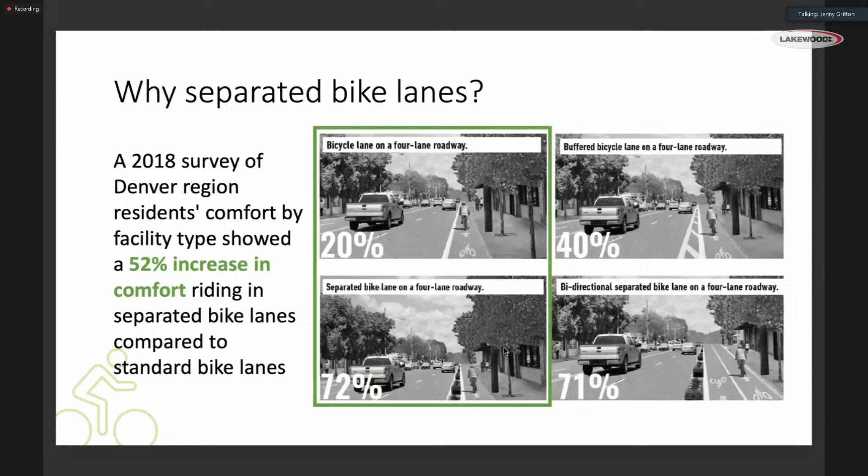This presentation is going to cover the next year of separated bike lanes in general, but there's a lot of focus on Garrison. That's the separated bike lane we most recently restriped during the annual overlay last July, and it's also a bike lane with a specific configuration I'll get into in a couple slides. I wanted to give a little special attention to Garrison - so why are we focusing on Garrison? Why is it the first separated bike lane we're planning on installing on Garrison Street?

A big part of that is because it's the only comfortable crossing of the 6th Avenue Freeway, which is the biggest barrier to bicycling in the city of Lakewood. Garrison is one of the safest places to get past that, so that's the primary reason we're focusing on Garrison.

It has a lot of connectivity between important destinations, parks, commercial districts, schools, down to the Bear Creek Greenbelt. It's also a Jefferson County regional bike route. There's a Central Bikeway that cuts all the way through several municipalities, and this is our segment of it, Garrison Street down to Estes.

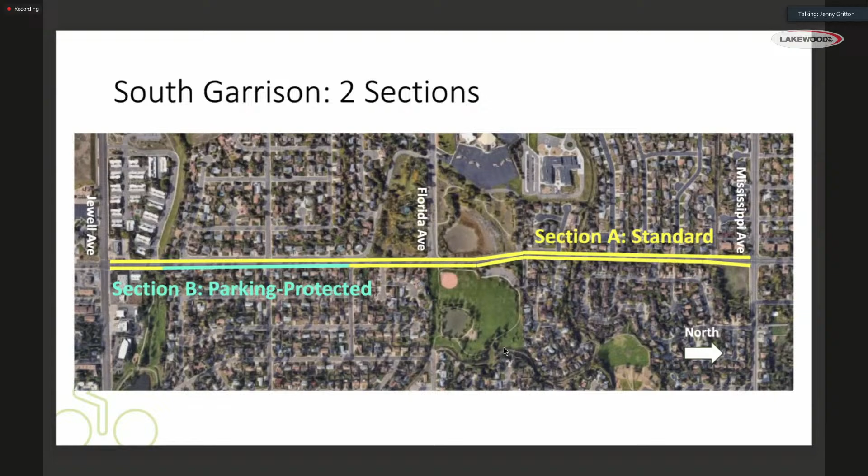Section B, highlighted here in teal, is what we're calling our parking protected segment, or parking protected bike lane. That's a bit more of a complex design that allows the existence of on-street parking and a separated bike lane by switching the configuration, which I'll get into in a couple slides. It's a little more complex and there are some more complicated trade-offs, but it was really the best option as we saw fit to go through with this segment, assuming we're able to complete separated bike lanes for the entire mile-long corridor, which was our goal.

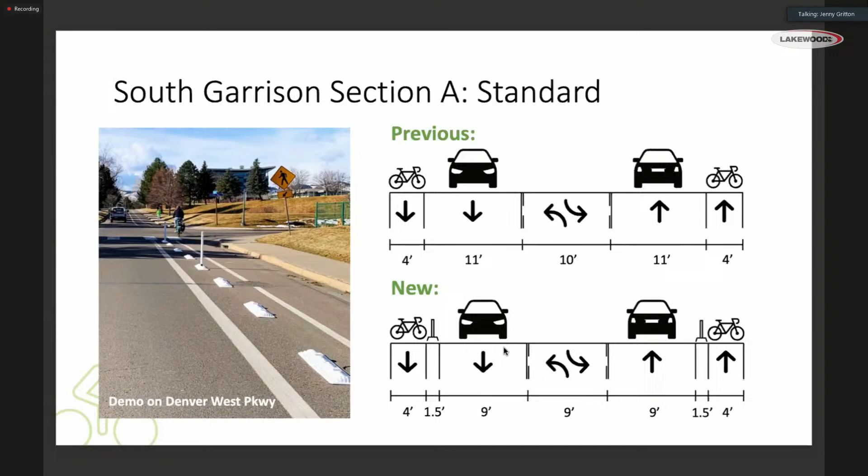That's a nice bike lane, we love to see that. But as the road existed before, we had bike lanes on either side, then a travel lane, but then we had that parking lane on the side directly adjacent to the curb. That's the condition that existed before, and that's the condition that exists on many roads throughout Lakewood. It's not an uncommon thing.

We also borrowed a few feet from the travel lanes like we did before so we could create that buffer space. But the main difference in this configuration is that the parking lane is no longer adjacent to the curb—the bike lane is adjacent to the curb. There is a separation, and then the parking lane is directly adjacent to the travel lane.

Now, the reason we did it this way—there are several reasons—but a primary reason is so that the parked cars themselves can serve as that vertical separation between the moving traffic and the bicyclists. The more the cycling traffic is separated from motor vehicle traffic, the higher the comfort of that bikeway, so that if a car were to veer off the road, they're not going to be hitting a bicyclist—they might be hitting a parked car instead. That is the vertical separation, and that's a downside of this design, but it would be protecting that cyclist from being involved in that collision.

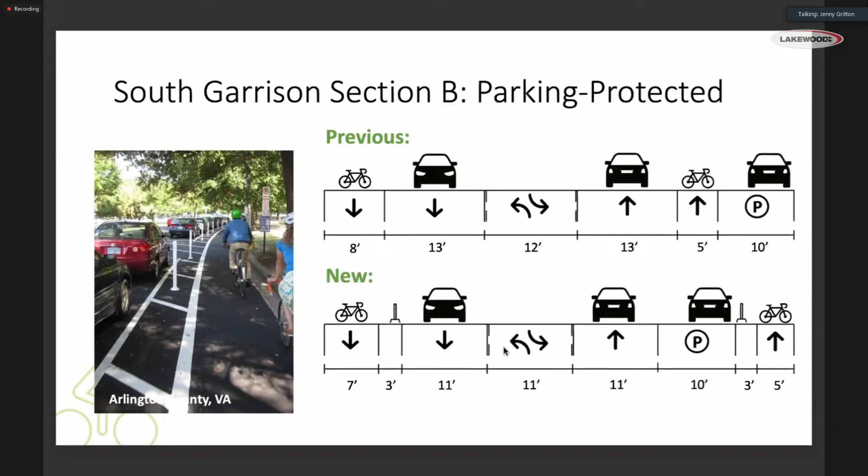Going a little deeper into the parking protected section, since it's the most complicated, it's getting extra attention. This is the only section with no vertical separation installed yet, so it's technically a new configuration right now. We've already received feedback about it, both positive and negative, and it's been a really good learning experience for if we ever install another parking protected bike lane.

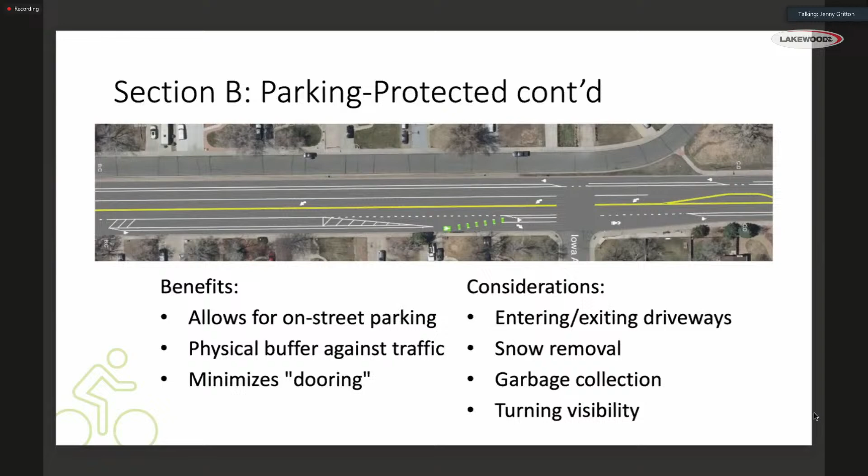We are still responding to feedback as we go, especially since the bike lane is technically not finished yet. Once the vertical separators are installed, I'm sure you'll hear more feedback that maybe we didn't think of before, and we'll have more chances to play with some solutions. But this is where we stand now with the complications that have arisen with that parking protected segment, just between Jewell and Iowa Avenue on South Garrison on that east side.

So moving forward, that was a lot, deep in the weeds there. South Garrison, our very favorite, is anticipated for completion in early 2024. Ideally, following this presentation and the final designs we're working on right now, we'll get that installed, with vertical separators going in in time for the summer riding season, which I expect will bring another wave of feedback from bicyclists able to use the facility. So that's hopefully coming in the first half of this year, which is very, very exciting.

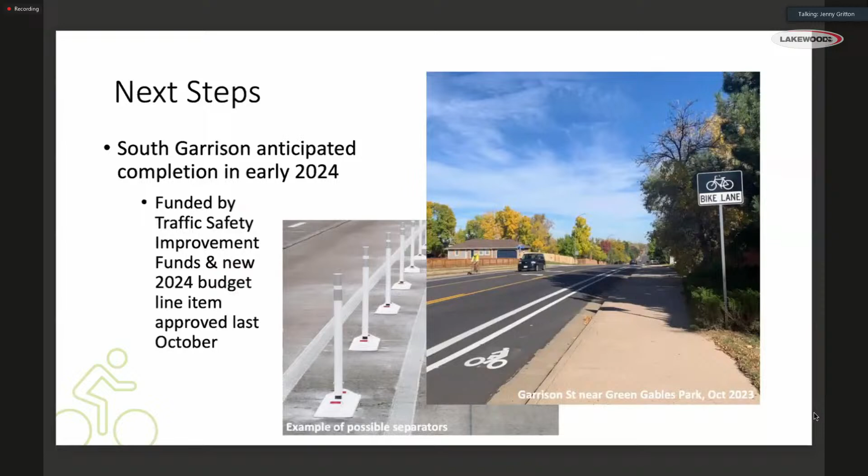We're fortunate enough to already have that funded by traffic safety improvement funds, which is partly what we've used for the initial striping, as well as a 2024 annual budget line item that was approved last October for this separated bike lane project. That was approved not only for South Garrison, but also for 2 other segments.

The 2 other roads we're looking at for 2024 that are already funded in that budget line item are a small segment of Harlan Street over on the east side, partly in Ward 1, partly in Ward 2, primarily because of concerns with cars parking in the bike lane. We've had complaints for years and years. We haven't found a good solution to get these people to stop parking in the bike lane, which is obviously a huge safety hazard. So adding those vertical separators will physically block anyone from being able to park in that bike lane, and it becomes a safety improvement for the road overall.

We're also looking to install a separated bike lane on Denver West Parkway up there in that northwest corner in Ward 1. I apologize, I said that Harlan Street was between Ward 1 and 2. I meant 2 and 3.

Long night. But Denver West Parkway up there in the northwest corner is another existing buffered bike lane that was installed probably 7 or 8 years ago, and is very highly used. It's an important connection between Lakewood and Golden, and a surprisingly high volume of bicyclists are riding on Denver West Parkway. We're looking at it as pretty low hanging fruit in terms of a first round of separated bike lanes, because it's a very wide buffer. It's a very simple street. You don't have on-street parking complications. You don't have a bunch of residential driveway complications like we see on South Garrison.

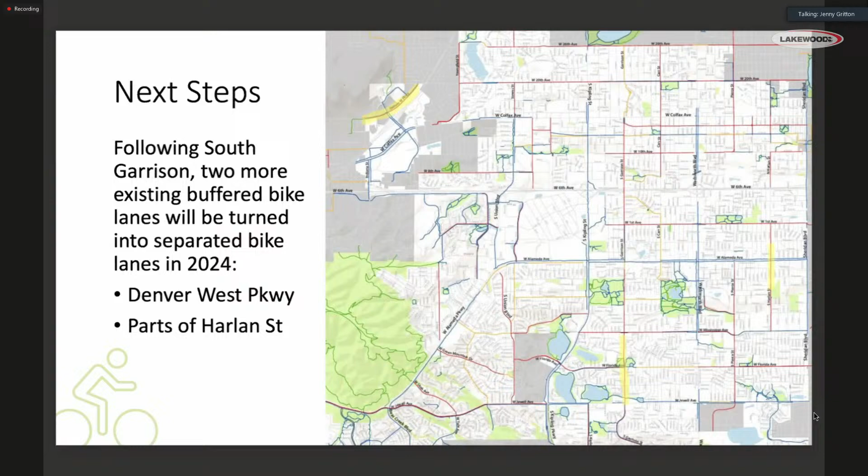So between these 3 separated bike lanes scattered throughout the city, each one has a different intent, and each one we are hoping to learn different things from. This is where we are planning on beginning our separated bike lane program in 2024, setting a strong foundation to move forward. Going forward from there, once South Garrison, Denver West, and Harlan are all installed and we've gotten the feedback and designs as good as we're going to get them, it's a very exciting time.

Besides all of this excitement, extra excitement is coming because we are starting to update our bicycle master plan. It has not been updated since 2018. The bicycle master plan as it currently stands does not actually include separated bike lanes in our proposed bike network, which is made up of bike lanes, shared use paths, shared roadways, and soft surface trails. Separated bike lanes are not a part of that network.

So we are going to be doing extensive public outreach. We're going to take a big look at our proposed bike network as it exists, what's working, what's not, a lot of spatial analysis, all sorts of good stuff coming in the next year as we update that bike plan. A big focus of that update is going to be integrating separated bike lanes into the proposed network, so that moving forward we have a roadmap on where separated bike lanes are coming next and why.

Because right now, looking at the 3 we're installing in 2024, it might not make sense at a glance why we chose three streets. So having a document that says here's what we're trying to do and here's why we're trying to do it is really, really exciting, and I'm really looking forward to getting that done.

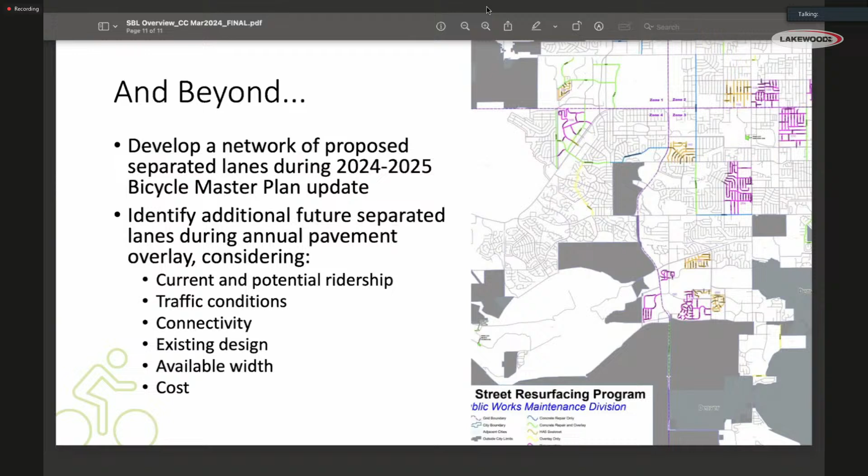You guys hear me now? Okay, perfect. Sorry.

Mr. Kirschbaum, did you have any other speakers, or is this where we go over to council comments and questions? That concludes our presentation. Barring any comments, we're prepared to move forward with the work on Garrison and then on the other two roadways later in the year. Thank you.

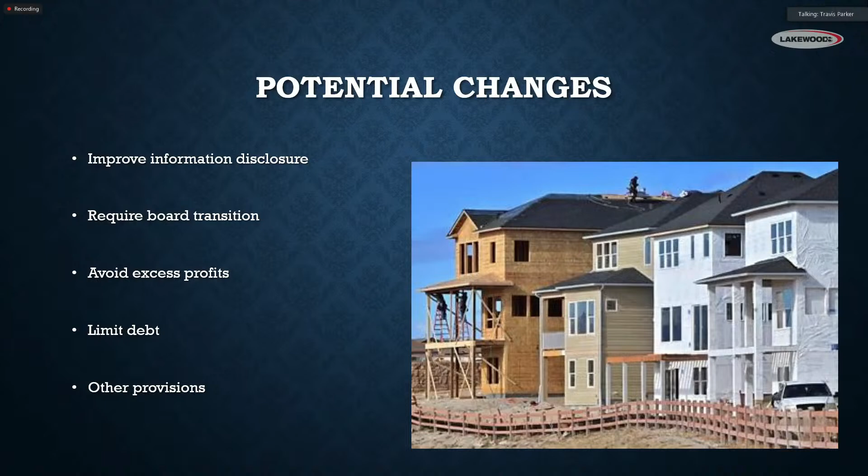I'm going to look at about 5 slides that give large categories of changes proposed in 2020 and 2021. These categories include improving disclosure of information about an upcoming or existing metro district, requiring a transition of the board from developer control to end-user or resident control, avoiding excess profits, limiting debt of the new district, and some miscellaneous other provisions. I should note that since 2021, there have been some changes to state law that have impacted some of these areas, so I'll call that out as we go through—some proposals from 2020 and 2021 may no longer be necessary because of subsequent changes to state law.

Starting with improving information disclosure, the recommendation of the Development Dialogue Committee and ultimately the City Council was a 1-page simple language disclosure on every property in a metro district. In newly formed metro districts, this disclosure would have to be created, recorded on every property, and presented for signature at every property transaction. There were sub-recommendations about penalties for non-compliance, but the general idea is a simple, clear disclosure at every property transaction to let people know they're in a metro district, what their obligations are now and potentially in the future as a resident.

The second area of recommended changes is requiring a transition of the board. Metro districts have an elected board, and when a metro district is created, all the property in that district is owned by one entity, generally the developer. So the first board is necessarily made up of developer representatives. There's interest on the part of future owners, and maybe the city, to have that board transition as quickly as possible to control by end users or residents. While state law controls when and how elections take place, the idea kicked around by the Development Dialogue Committee and City Council in 2020 and 2021 was to require that when a new metro district is created, the developer's representatives sign a commitment to resign at a certain point, either after a certain time frame or when development reaches a certain level. That's the second category of recommendations considered.

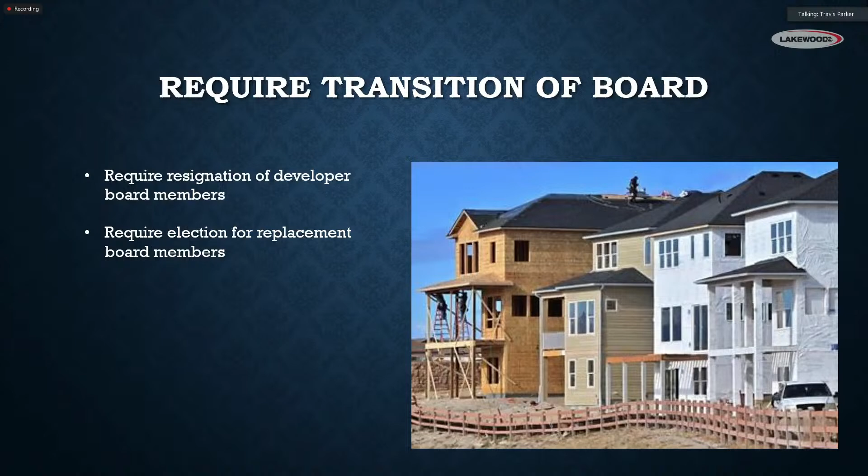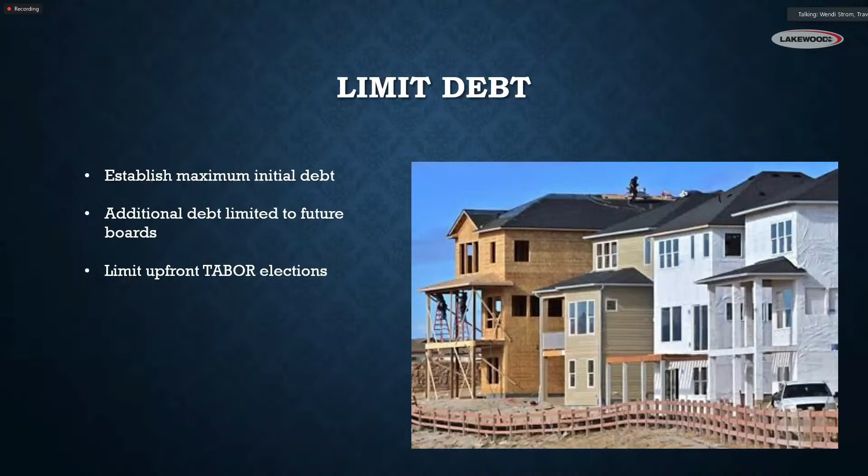In terms of limiting debt, the council talked about perhaps establishing a maximum initial debt limit and limiting future debt to a board controlled by residents rather than developer representatives, and limiting the TABOR exemption. There's a necessary TABOR election at the creation of the district, but perhaps limiting the scope of that initial TABOR election and requiring future TABOR elections or expansions of the TABOR provisions to be limited to future boards controlled by end users or residents of the district.

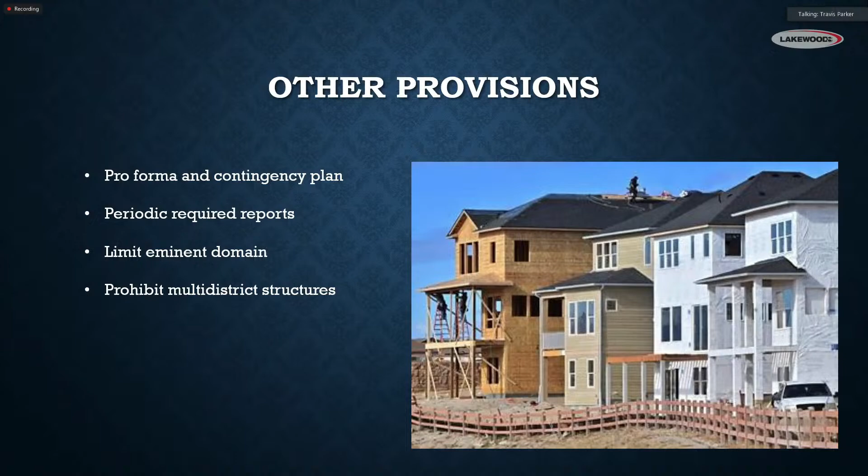That's a very short, high-level overview of the types of changes proposed in 2020 and 2021. There's a lot more detail in the memo that was put on Lakewood Speaks for this meeting, and a number of memos previously sent to council with past information from 2020 and 2021. I'm available tonight to talk through these issues and answer questions. Anything I can't answer, we'll take down and get answers to council as soon as possible. If council provides guidance to move forward tonight, an ordinance will be drafted with some or all of these changes, followed by first and second public hearings to make any potential changes.